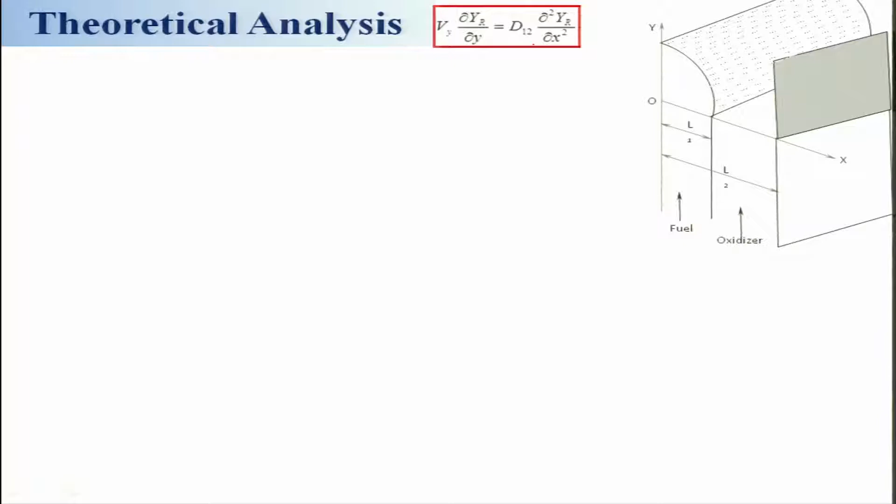We have basically looked at this expression, in which YR can be either fuel or oxidizer. So, the equation form will be similar. Keep in mind that this is a partial differential equation, and it is second order. We can also do a little more simplification, considering the assumptions we have made, and convert it into a diffusion equation by considering y is equal to Vy t.

And if I want to look at dou YR by dou y, I can write this as dou YR by dou t divided by dou y by dou t. And dy by dt is nothing but Vy. So, therefore, this will be an ordinary derivative dYR by dt, because it is a function of t only now, and then Vy.

So, therefore, I can write down Vy dYR by dy is nothing but dYR by dt. So, I can derive this expression. Keep in mind that this is a second order differential equation, and it has to be solved. And this equation is known as the Burke-Schumann equation.

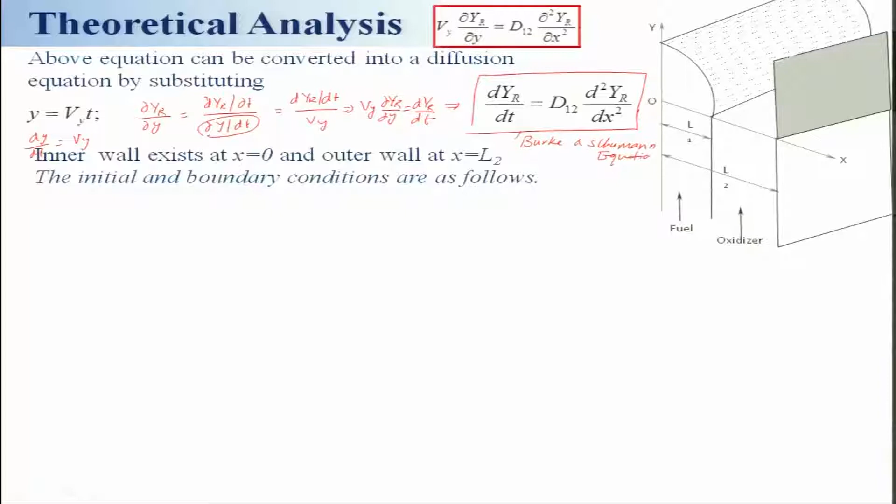This equation is known as the Burke-Schumann equation because both of them derived it, and we will now have to apply the boundary conditions. Keep in mind that this equation is valid in all the regions except on the flame surface, and therefore the source term has been neglected in both equations.

So, now the inner wall exists at x is equal to 0, and the outer wall at x is equal to L2. This is L1 and L2. The initial condition will be t is equal to 0, meaning y is 0. YR will be whatever it is at the initial condition; in this zone it is fuel, so it is equal to YF at this point.

And the boundary condition at x is equal to 0: the gradient dYR by dx at x is 0 is 0, which is basically a symmetric condition. The flame is symmetric, meaning the other half will also be there. Similarly, at x is equal to L2, dYR by dx is 0, so again the gradient is 0 on the far-away air side, since it is far away from the flame.

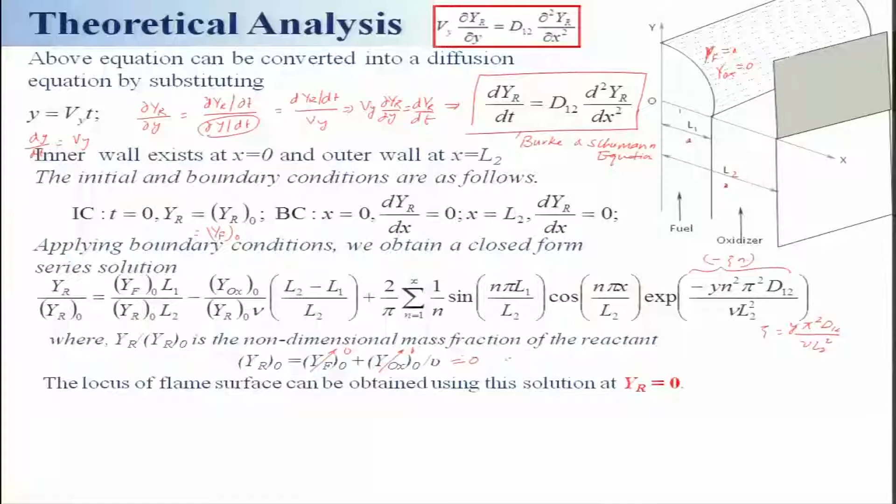So, in this equation, you can say this is 0, because Yr is 0 at the surface, and this is of course the initial condition. I can write down Yr will be Yf plus Y oxidizer into nu at the flame surface. So, therefore, this will be 0 and this is 0. So, this will be 0 at the flame surface.

Now, if this is 0 in this equation, let us say equation 1 for the time being, then what will happen? There is basically the series term in the right hand side of equation 1, and this term I can say is equal to E. E means I can say this is Y oxidizer by Yr nu times (L2 minus L1) divided by L2, minus Yf L1 divided by Yr at the initial condition L2, is equal to E, is equal to what?

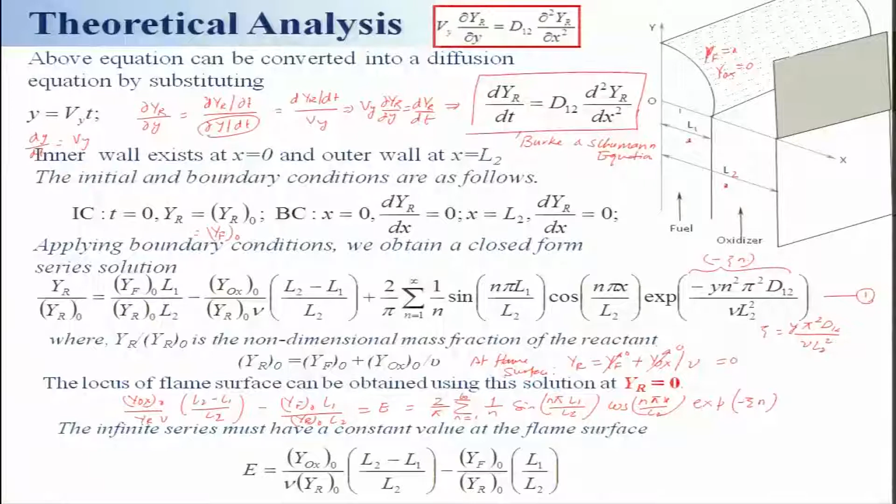Now, the series solution, if you look at it, depends on x by L2, it depends on zeta, and it depends on L1 by L2. These are the values on which this has to be dependent. I will write that down a little better. So, this series solution depends on L1 by L2. Why am I saying so?

Because if you look at E is equal to 2 by pi, sum from 1 to infinity of 1 by n sin(n pi L1 by L2) cos(n pi x by L2) exponential of minus zeta n. So, therefore, it will depend on L1 by L2, it will depend on x by L2, and depends on zeta.

At the burner rim, this point here, the series, which I can call a constant value, becomes a square wave, and when x varies from 0 to L1 in this region, zeta will be 0. And Y oxidizer will be 0 in this region, because no oxidizer will penetrate into the fuel stream. When x is between 0 and L1, this is your fuel stream. So oxidizer cannot penetrate, therefore this oxidizer will be 0, and Yr is nothing but your fuel at the inlet.

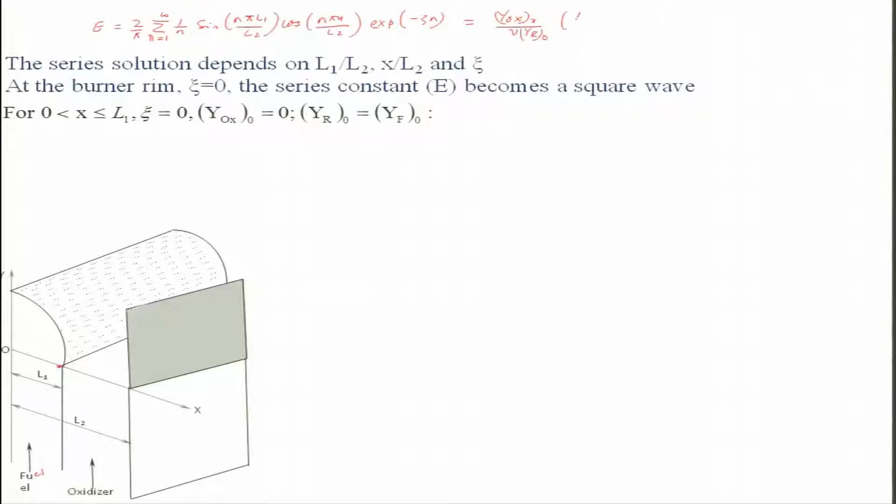So, if that is the case, then what will be E? We have already seen that E is Y oxidizer by nu Yr times (L2 minus L1) divided by L2, minus Yf by Yr L1 by L2.

So, x lies between 0 and L1 in this region. What is happening, Y oxidizer is 0, that means this term is 0. So, if that is 0, what I will get is E is basically equal to minus L1 by L2, and Yr naught here, this portion, is nothing but Yf naught.

So, this cancels out; this yr naught is nothing but your yf. So, therefore, you will get this term, and E comes out that way. Let us now look at the oxidizer side, between L1 and L2. In this case, yf will be basically 0, yes or no? On the oxidizer side there won't be any fuel; that is the assumption.

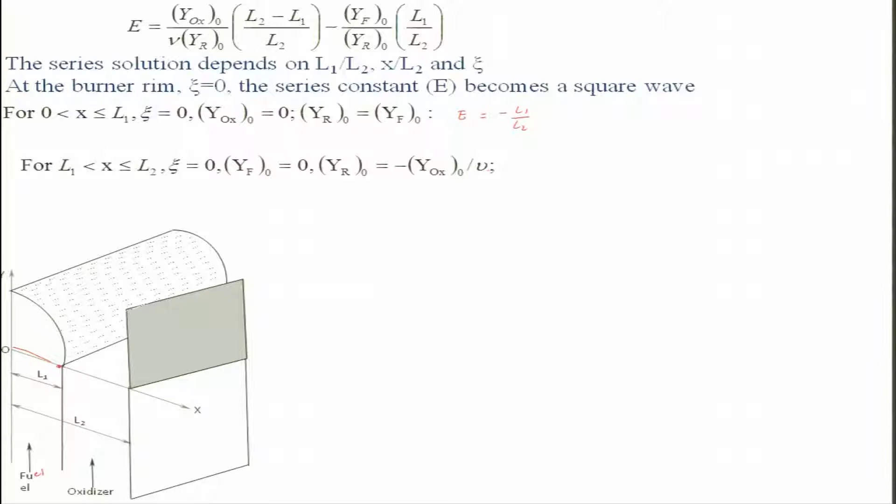That means as soon as the fuel or the oxidizer reaches the flame surface, it will just be consumed; the mass fraction of the fuel and oxidizer on the surface of the flame will be 0, they cannot cross each other across the flame. Whereas yr naught we know is minus yox by nu. So, if I look at this region, this is your oxidizer region, and I am considering this surface.

So, yf will be 0, this term will be 0, and in place of yr naught I will be writing y oxidizer by nu. So, this and this will cancel out. So, what you will get is E is equal to L1 minus L2 divided by L2, no sorry, and by that you can very easily get E in terms of these dimensions, evaluating E.

So, when the fuel air ratio is stoichiometric, E becomes 0. If E is 0, because the fuel air is stoichiometric, what I will write down is yox by nu times yr, L2 minus L1, is equal to yf by yr naught, L1 by L2.

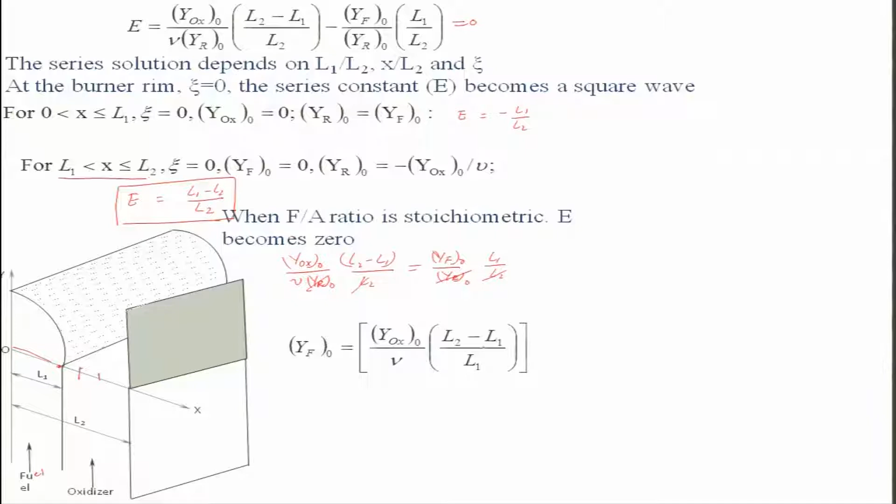So, this will cancel out, and you will get basically yf naught is equal to yox by nu times L2 minus L1 divided by L1. So, this is the expression one can get for the flame surface. You can solve these equations using these various conditions, working on the oxidizer side of the flame. Then you will be knowing this L2, this L1, this nu, all those things.

So, by using this series one can get various points at different radial directions, and zeta will be changing with x; that series solution has to be obtained, and then you will get a contour like that. This is the condition which is over ventilated, and there is a condition where it will be under ventilated. Under ventilated means when there is excess fuel, E becomes negative and the flame becomes under ventilated, and for excess air E becomes positive and the flame becomes over ventilated.

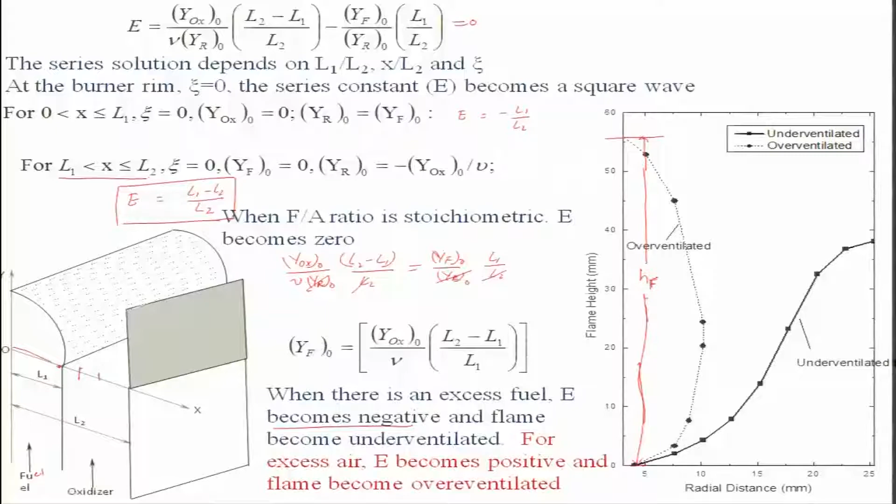Once you calculate this, you can find out the flame height; in this case this is the region you can call the flame height HF, and by this you can find out the flame length. But the limitation of this model is that it is very rudimentary and requires mathematical treatment, the thin flame approximation need not be right, and radiation is not taken care of. However, it gives the experimental data trend, but not exact values.

Several people have tried to modify it to get an analytical solution; Roper later modified this, added some terms, which is quite elaborate, and I will not be discussing it here. This is about the 2D flame, but there are axisymmetric flames which we generally use. For that, you get similar second order equations using the same analysis, but you have to use the Bessel function instead of a series solution. It is given in the book Principles of Combustion by K.K. Kuo, but I will not be covering it in the lecture.

I think with this we will stop. In the next lecture, we will be discussing Roper's analysis and also some experimental results, and how to estimate the flame length or the flame height of a jet diffusion flame.